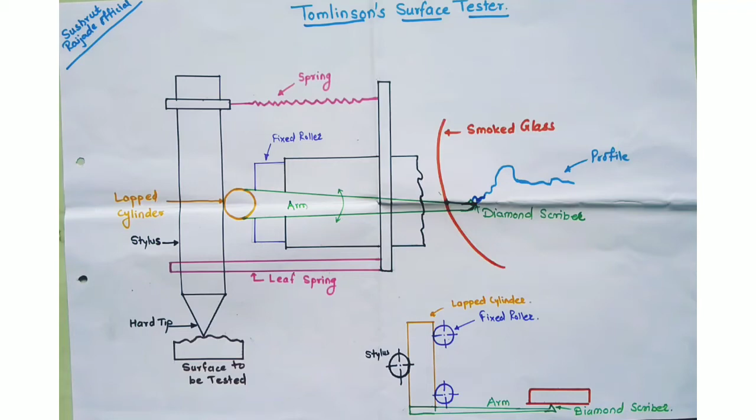In this video, we are going to see the construction and working of Tomlinson surface tester.

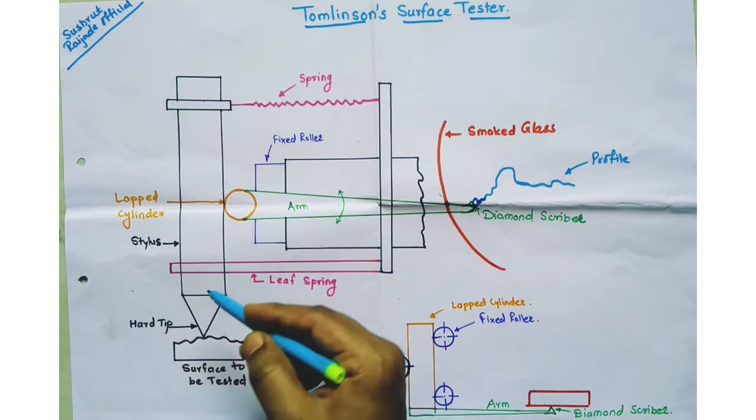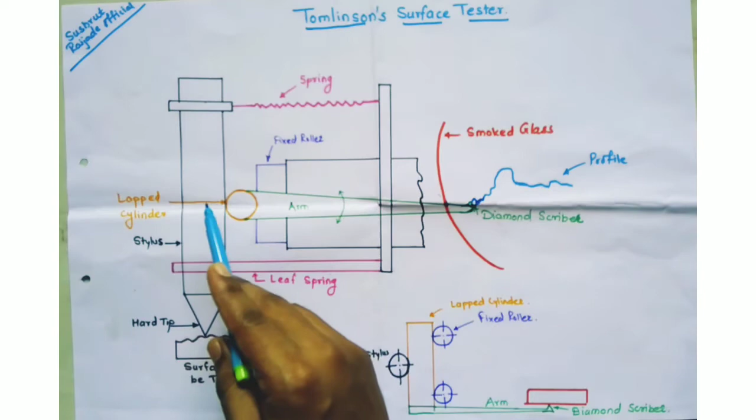First, we will see the construction. In this Tomlinson surface tester machine, the stylus is provided. This is a vertical stylus which has a hard tip, also known as a diamond probe. This stylus is held by two springs, a leaf spring and a normal general spring, and these springs are provided because the stylus should move in a vertical direction only. Another purpose of the spring is that the stylus is held against the lapped cylinder.

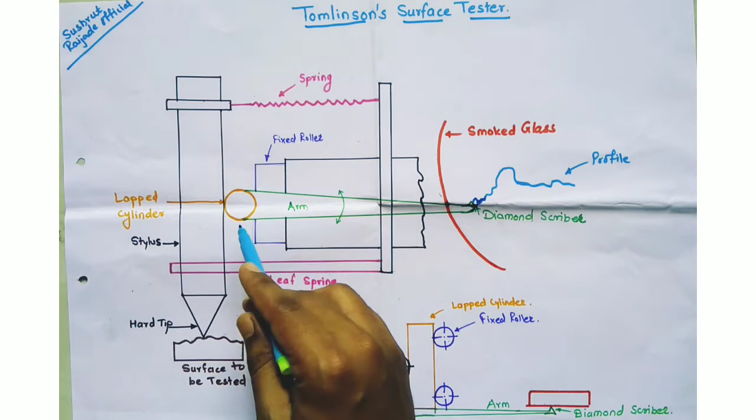Here the lapped cylinder is provided. This lapped cylinder is held with the help of the stylus and the fixed rollers. Here you can see this is a lapped cylinder, this is a stylus, this is a top view of the tester, this is a stylus, lapped cylinder, and this lapped cylinder is held with the help of fixed rollers. This lapped cylinder rotates between the stylus and the fixed rollers.

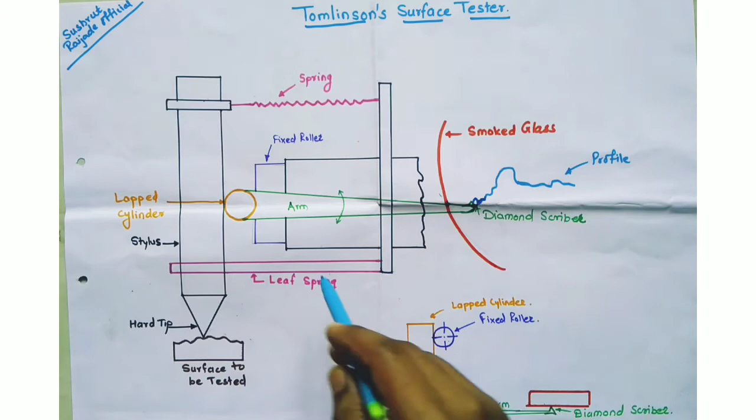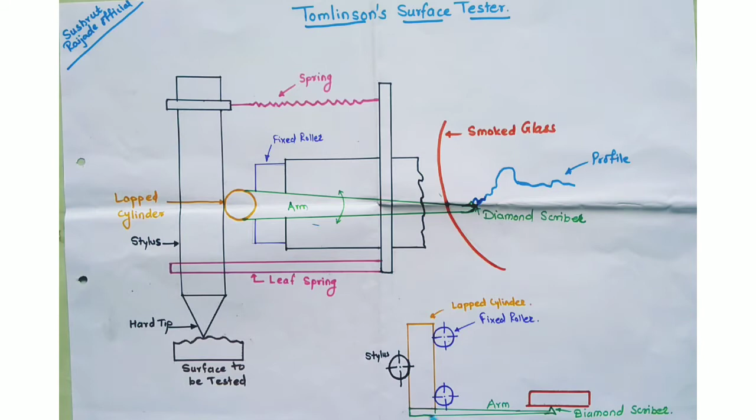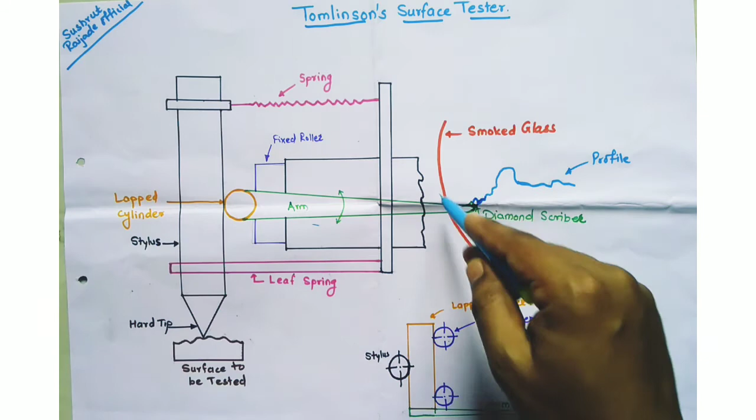Then the lapped cylinder is attached with the arm, meaning the arm moves with the help of the lapped cylinder. This arm moves in this direction. Then the diamond scriber is provided with this arm. This diamond scriber makes a profile on the smoked glass, it scribes the profile on the smoked glass. Smoked glass is provided. This is what the construction looks like.

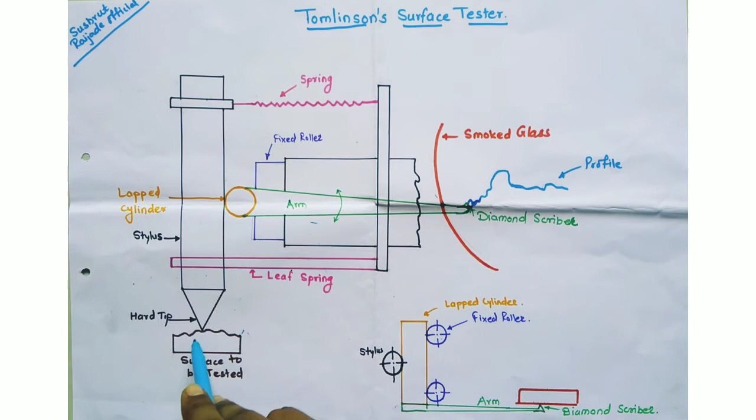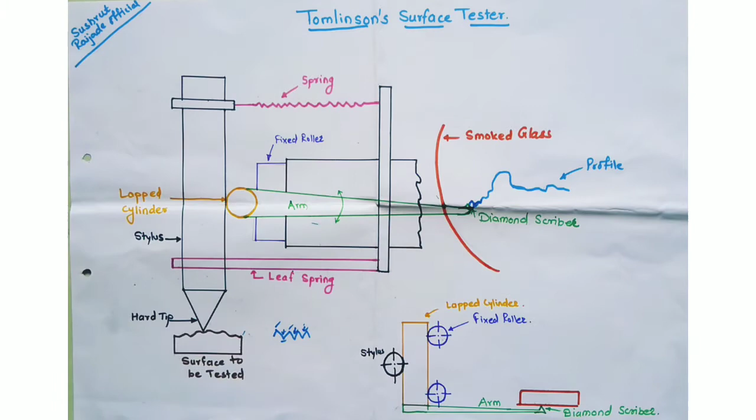Now the working of the Tomlinson surface tester. The surface to be tested is passed across the stylus. The surface has irregularities on it, meaning it has crests and valleys present on that surface. Crest means hills, and valley means valleys. These are the hills and these are the valleys. These hills and valleys make the stylus move in a vertical direction only.

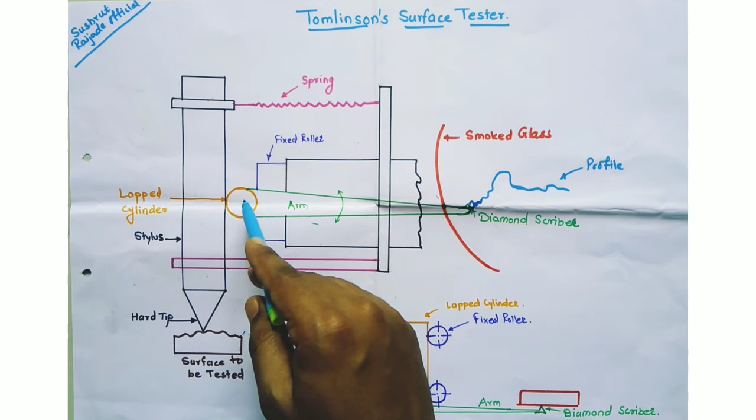Due to the vertical movement of the stylus, it makes the lapped cylinder move. This lapped cylinder starts rotating. If the stylus moves in a downward direction, it moves in a particular direction, and if the stylus moves in an upward direction, then the lapped cylinder moves in the opposite direction of the first one. Then the movement, or rotating movement, of the lapped cylinder makes the arm move in either direction according to the movement of the stylus on the hills and valleys.

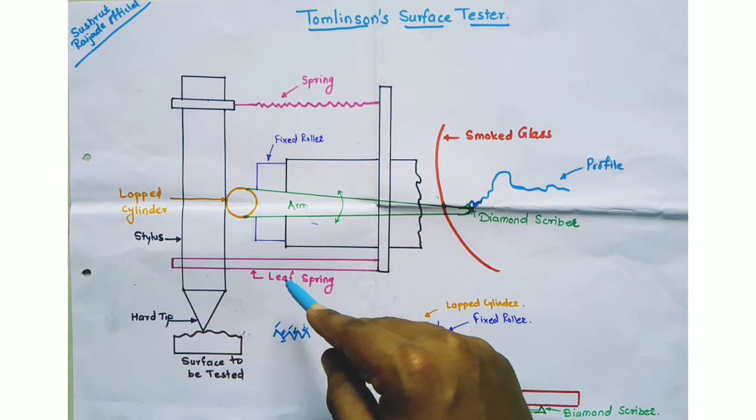This movement of the arm in either direction makes the diamond scriber move, which makes a profile on the smoked glass. This profile is made due to the irregularities present on the surface. Those irregularities are marked on this smoked glass.

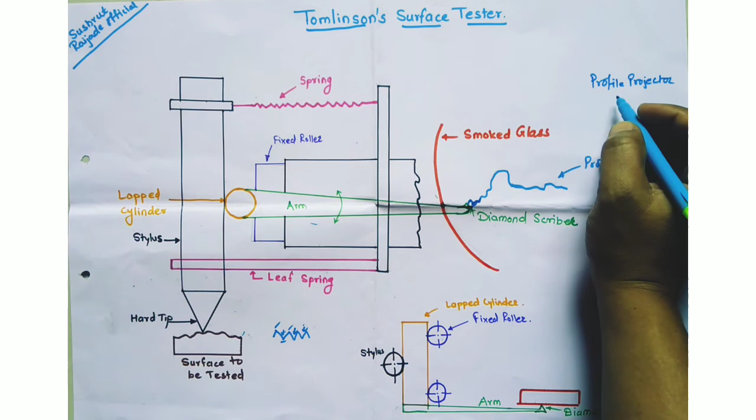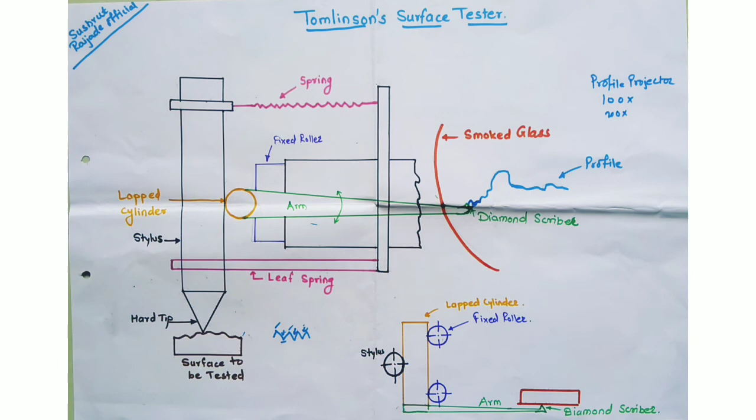Now to measure the surface roughness, this profile is zoomed or enlarged with the help of a profile projector. This profile can be enlarged 100x, 200x, up to this zoom level, or with the help of this lens at 100x and 200x, you can enlarge this profile and measure the surface roughness. This is the working of the Tomlinson surface tester.